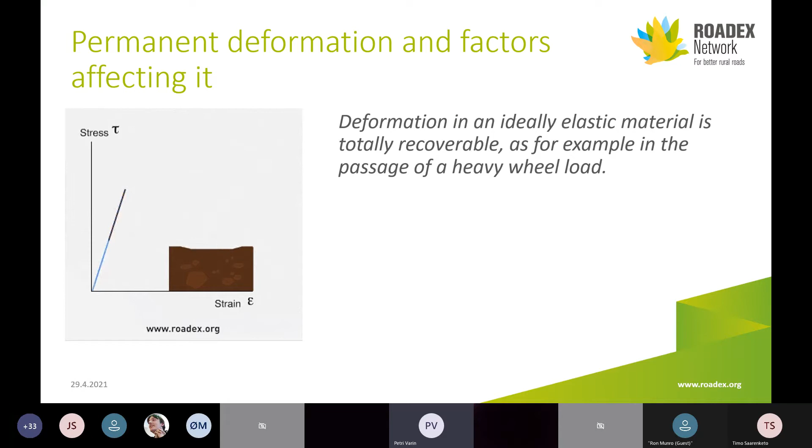Deformation in an ideally elastic material is totally recoverable, meaning that if the stress is taken out, the material returns back to its original shape. However, road construction materials are not ideally elastic, and they will accumulate some permanent deformation as a result of every load application.

Here you can see the diagram showing that the response to a heavy wheel load is always a combination of some resilient deformation and a small proportion of permanent deformation.

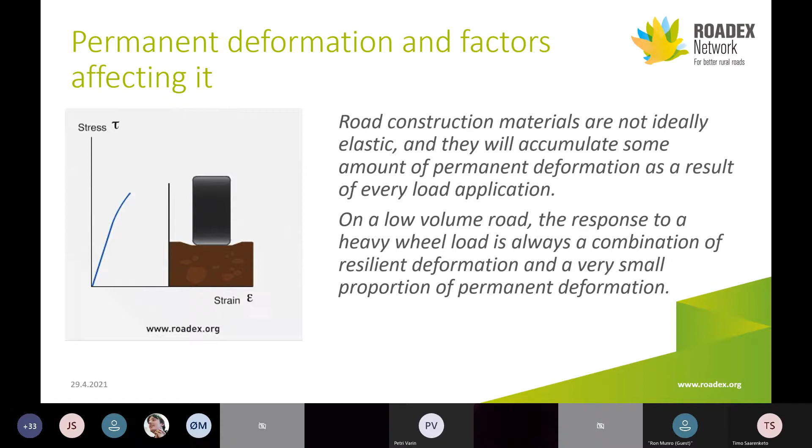When the stress is relatively low and far away from the strength and failure stress limit of the material, at the start of loading the strain increment is first high due to initial compaction of the aggregate, but then it will soon settle down and stabilize.

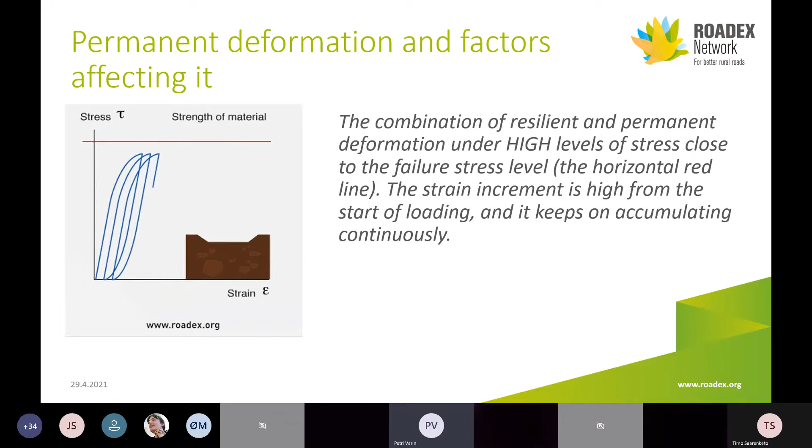To a constant level. But on the other hand, if the stress level is high and close to the strength of the material, the failure stress level, then the strain keeps accumulating continuously, it's not stabilizing anymore, and the rut increase keeps on increasing.

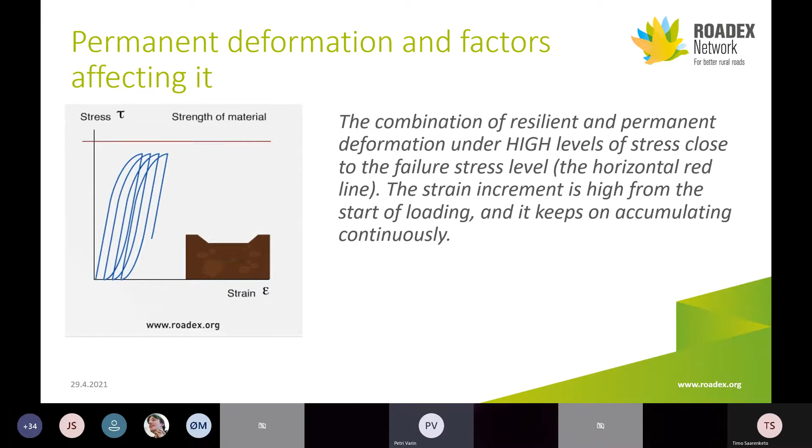So what kind of problems does permanent deformation cause? First of all, traffic safety issues.

The ruts on the roads collect water, giving a risk of aquaplaning. Different kinds of deformations, bumps and settlements on the road cause warping of trucks and unhealthy vibrations to truck drivers, and other traffic safety issues, a risk for accidents.

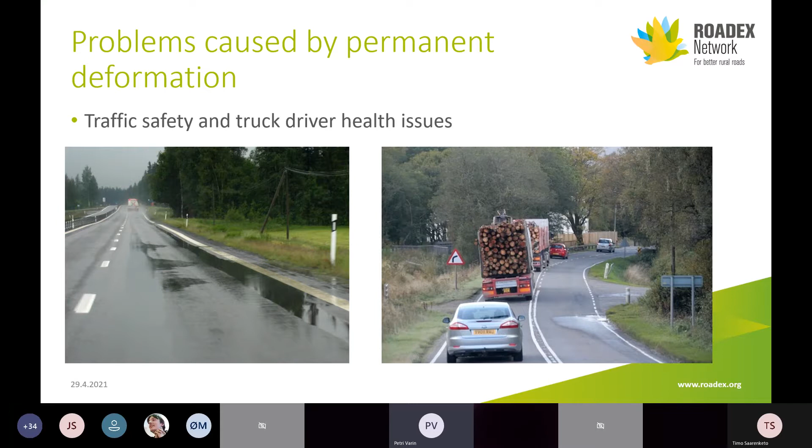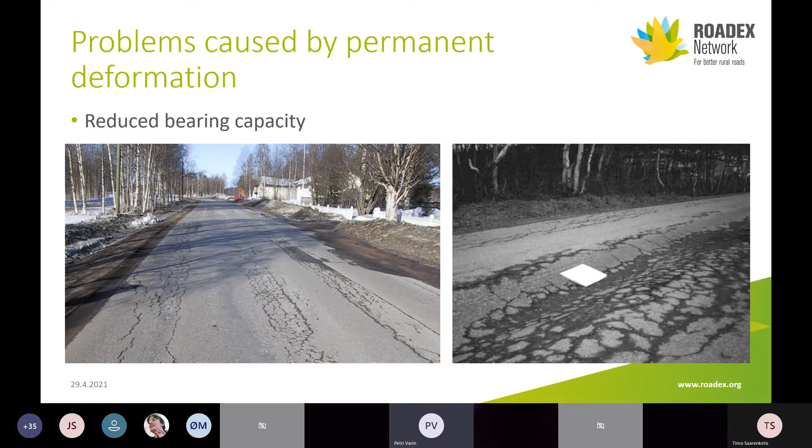Reduced bearing capacity - first of all, low bearing capacity is a reason for permanent deformation to take place, and on the other hand, when there is permanent deformation on the road with damages and ruts, it accelerates the rutting further.

Higher road user costs, for example higher tire costs and increased fuel consumption due to the uneven road and the ruts, and higher road owner costs as well, as I already mentioned and showed.

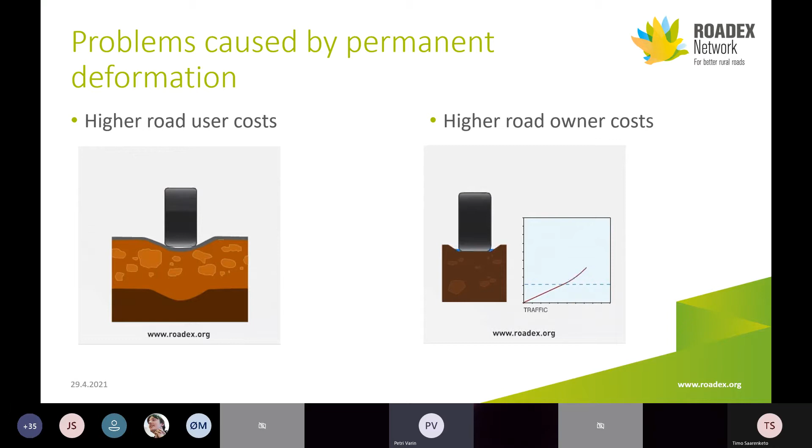The ruts in the road collect water, and that together with the traffic accelerates damage exponentially after the ruts start to collect water. Then the damages on the road also start to increase exponentially.

Lesson number 2 gives more detail and some idea of the stresses and strains in the road structure.

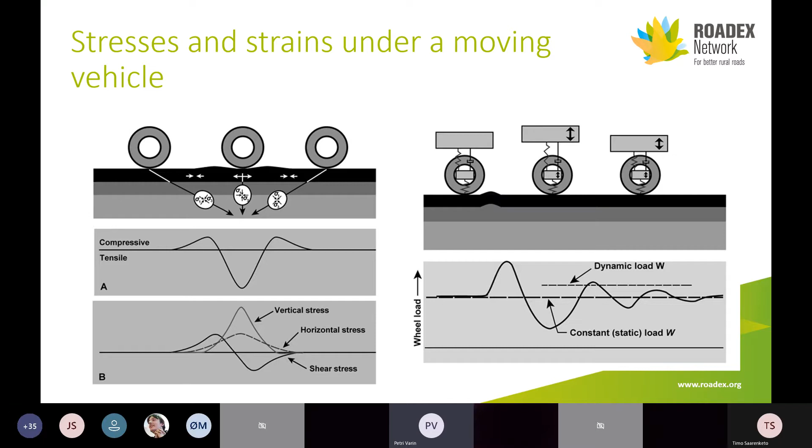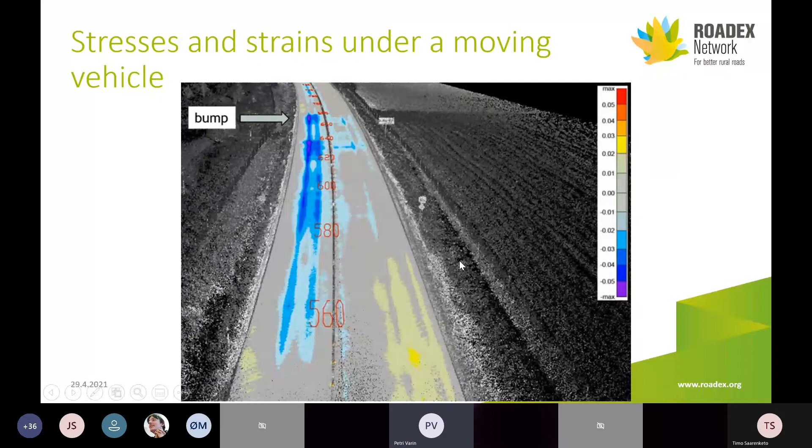With a traffic speed of 80 to 100 kilometers per hour, one bump on the road can have an effect on the pavement for almost 200 meters, and you can even see in the picture the locations where the truck's suspension hits down after the bump. So the effect of one bump can be very long on the road.

Road construction materials follow a viscoelastic behavior. They are not... they need some recovery time after they have been loaded.

In this picture you see 2 aggregate trucks and truck-and-trailer combinations passing the Koskenkylä Percostation in Rovaniemi, Finland, and their effect on the dielectric value in the poor quality subbase. The material response follows typical viscoelastic behavior.

Truck number 1 first raises the pore water pressure, then the second truck and the trailer of the first truck follow. There's a little bit of time to recover, but not enough before the second truck and trailer comes, showing the typical pumping effect. In this example, it takes 18 seconds to recover back to the original level.

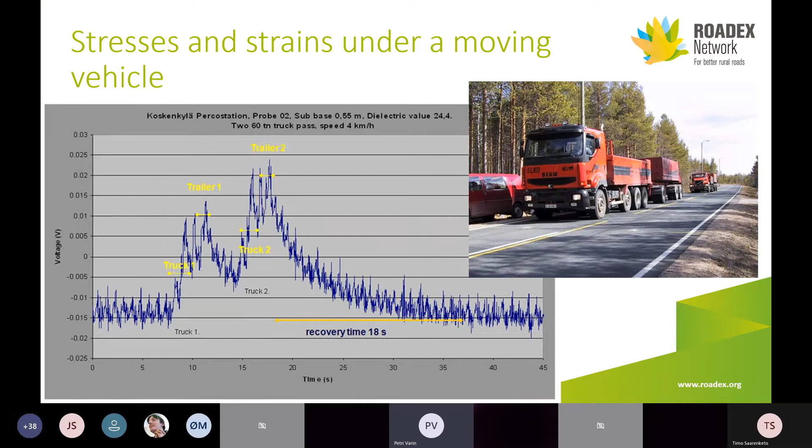A key step in improving the condition of a road suffering from permanent deformation is precise and reliable problem diagnosis. The structural quality of a road is defined by its so-called weakest link. Here on the figure on the left, the weakest spot is located at the subgrade level, and the structure has the risk for mode 2 rutting.

And on the right, the highest risk is in the unbound structural layers, and the risk is for mode 1 rutting.

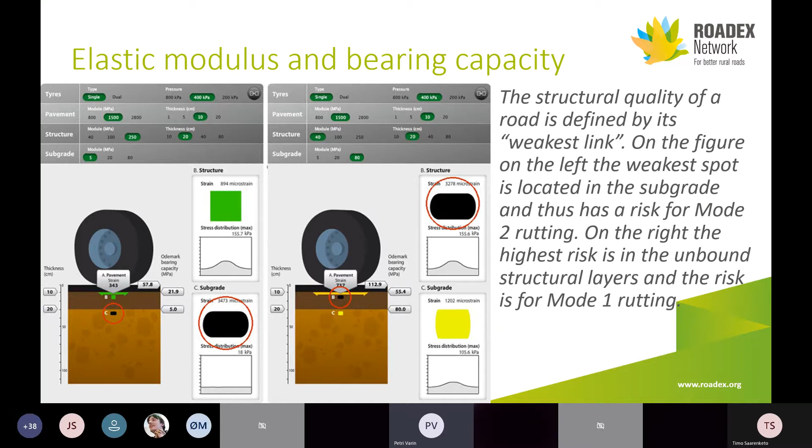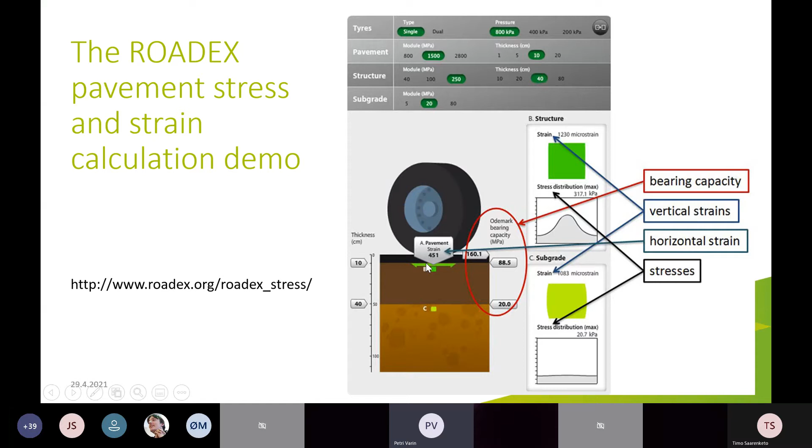Those examples in that previous slide and this one here are taken from the ROADEX pavement stress and strain calculation demo. There is a link to that demo at the end of lesson 2 of the eLearning package, and there you can change the tire type, single or dual, and the tire pressures, and the pavement structure and subgrade modulus and thickness for the pavement structure, and you can see right away the effect on the stresses and strains and the overall bearing capacity of the structure, shown with these arrows and rectangles.

Lesson number 3 presents the permanent deformation rutting classification according to the ROADEX project.

First, mode 0 rutting takes place through the compaction of the non-saturated materials in the pavement structure, and in practice some level of mode 0 compaction always takes place in the road structure after its construction. Normally the construction compaction prior to trafficking is sufficient to prevent further compaction under trafficking, and this mode of rutting is usually self-stabilizing. In other words, the compaction that happens prevents further compaction.

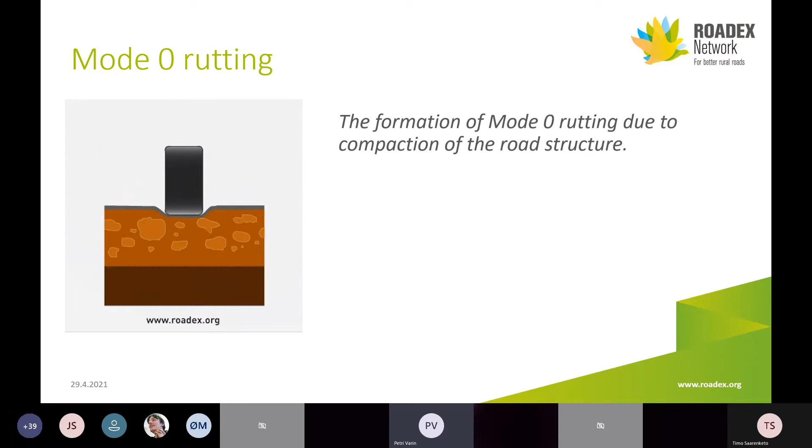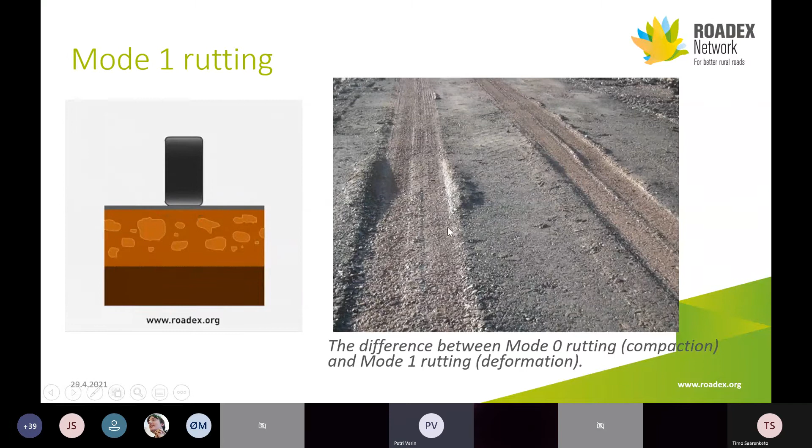It also causes the compacted material to stiffen and thereby spread the load better. Then mode 1 rutting happens in weaker granular materials where local shear stresses occur close to the wheel, so it takes place in the top part of the structure. It gives this dilative heave immediately adjacent to the wheel track where the granular material deforms. The picture on the right shows the difference between mode 0 rutting, the compaction, and mode 1 rutting, which is deformation of the granular materials.

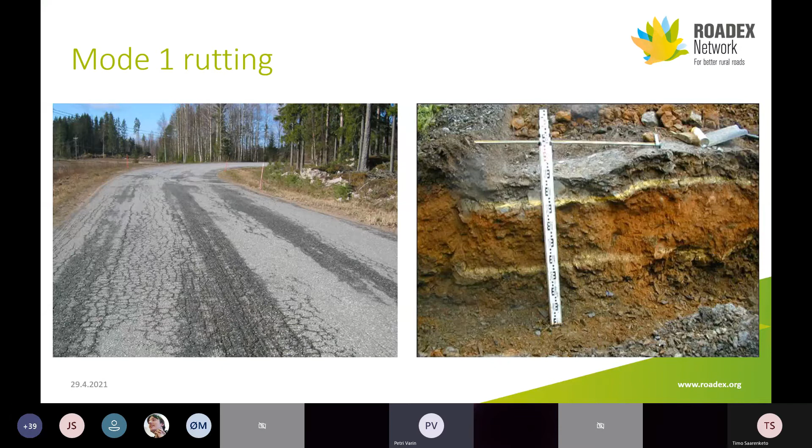Then mode 2 rutting takes place at the road structure and subgrade interface. Mode 2 rutting occurs where the aggregate quality is better, and the road structure as a whole ruts. This can be viewed in idealized fashion as the subgrade deforming, and the whole structure is like a deformed shape bending over that.

The surface deflection pattern of mode 2 rutting takes the form of a broad rut with slight heave removed from the wheel.

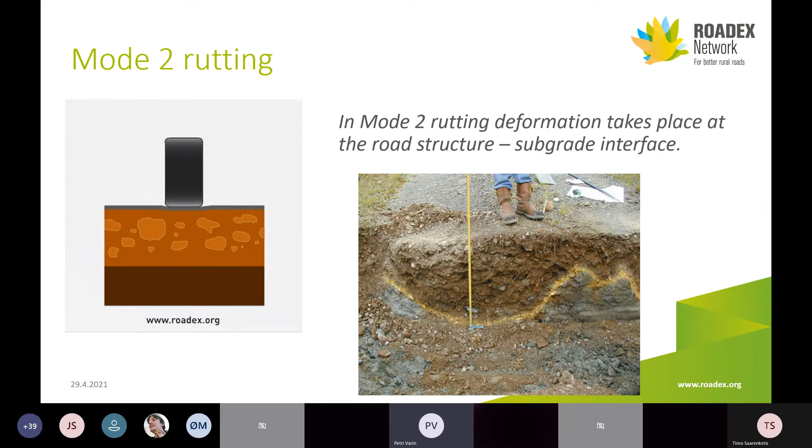On the left you can see typical mode 2 rutting on a paved road, a wide rut, and the picture on the right shows a GPR cross section from a gravel road suffering from severe mode 2 rutting problems. The structures are very thin on the shoulders and also in the middle of the road, and the wheel tracks have been rutting, with new layers filled in over and over again.

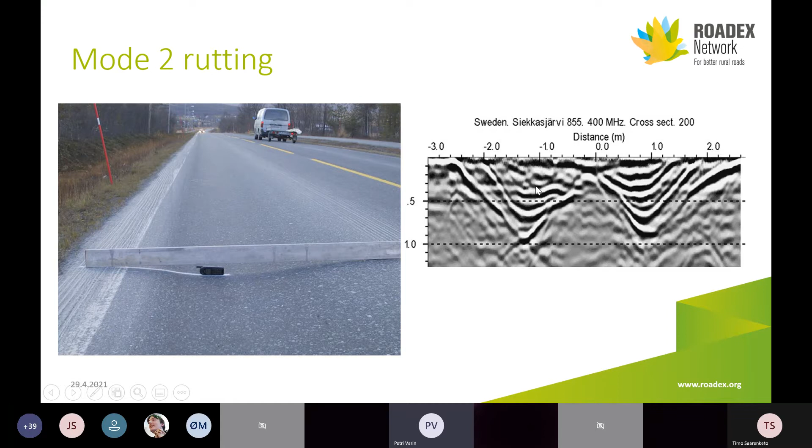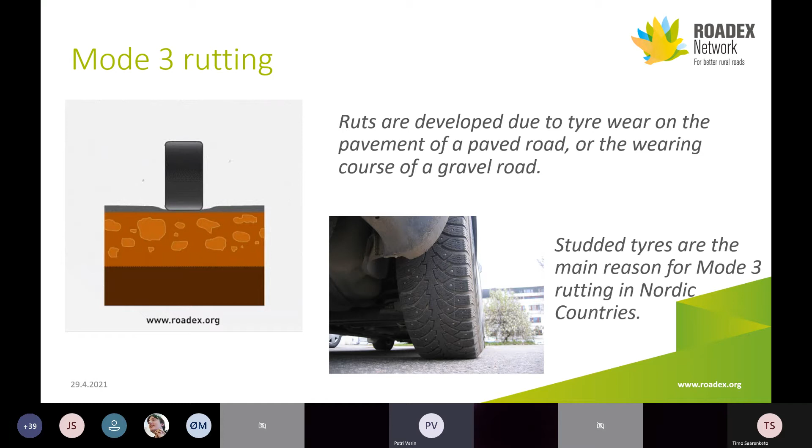Finally, mode 3 rutting is developed because of tire wear on the pavement of a paved road, or the wearing course of a gravel road. Studded tires are the main reason for mode 3 rutting in Nordic countries. Mode 3 ruts can be identified by very sharp ruts, and the distance between the rut wheel paths is normally the spacing of passenger car wheels, which is narrower than the truck axle width.

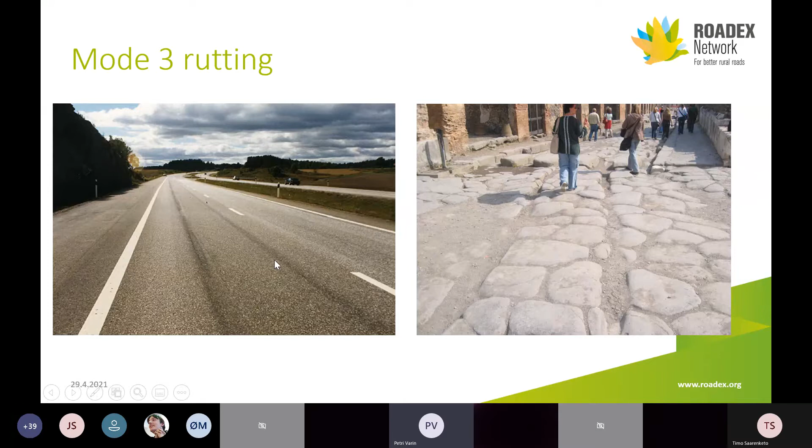Lesson number 4 presents a large number of different kinds of survey and monitoring techniques related to permanent deformation and investigation of its reasons, such as drilling, sampling, and excavations. Modern NDT techniques continue to make road diagnostic surveys faster and more reliable, but they will never eliminate the need for drilling, boring, and sampling.

Structures will still need to be verified, and the NDT surveys will need calibration data and samples taken for laboratory analysis.

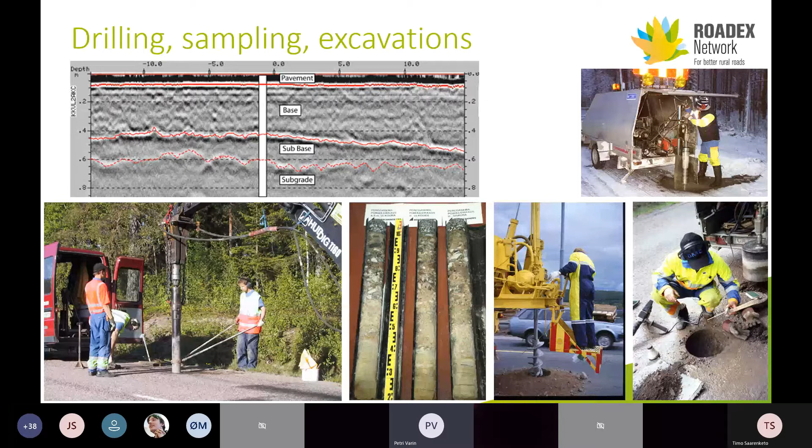Video recordings give a continuous record of the road, and from it you can detect road surface condition, pavement distress, road markings, traffic signs, etc. It can also be a very useful aid in surveying the topography of the road and its surroundings. Video recording of the road and ditches with an audio commentary is also an easy way to gather basic information for drainage analysis, for example.

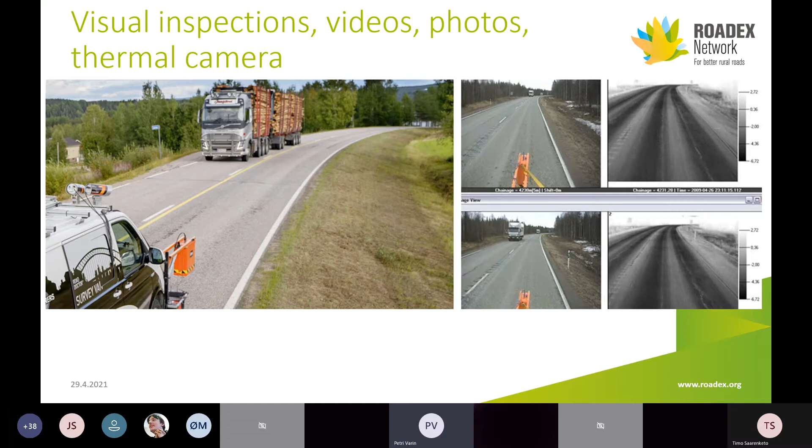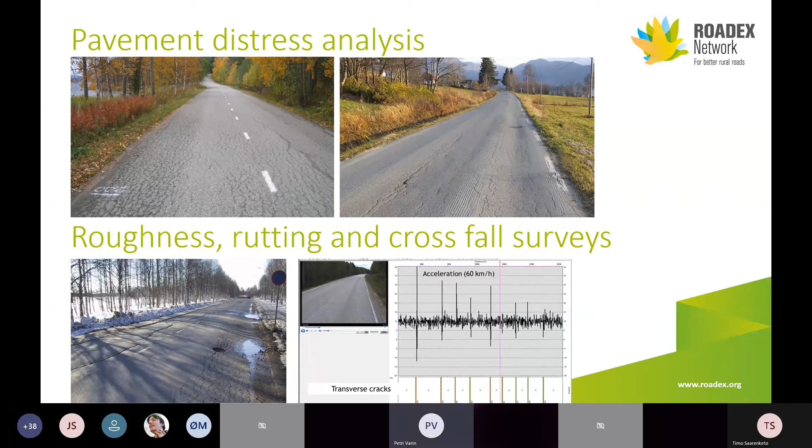Pavement distress analysis and roughness, rutting, and crossfall surveys also give valuable information about the reasons and possible remedies for permanent deformation and the different rutting modes.

As for laser scanners, in recent years the greatest development in NDT techniques for road surveys has been with laser scanners, and these systems have become a standard tool for various tasks in the road condition management process, such as measuring rut depths, ditch depths, ditch slope steepness, crossfall of the road, and so on.

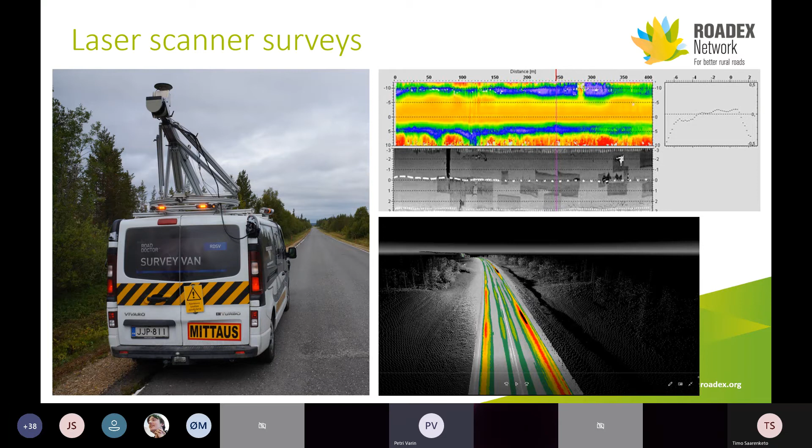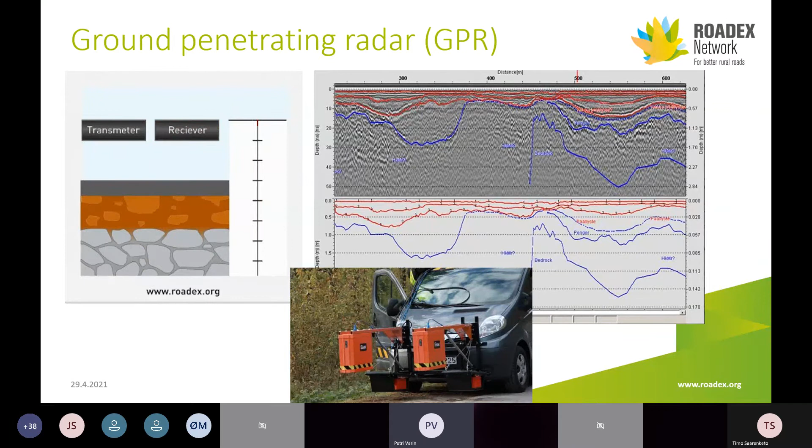Then GPR, ground penetrating radar. It's a non-destructive ground survey method, and its main advantage is the continuous profile it provides over the road structures and subgrade soils. As a consequence, the technique has become an important survey tool, especially for structural evaluation of low volume roads. And further, the important advantage is that it's not intrusive to other traffic. It can be performed at normal traffic speed.

Then different kinds of deflection measurements: falling weight deflectometer, lightweight deflectometer, traffic speed deflectometer. They provide information on the bearing capacity of the structure and stiffness, and directly from the measured data, many bearing capacity indexes such as SCI and BCI can be calculated, which provide information on the location of the weakest link in the structure. Also, when the deflection measurements are combined with GPR thickness interpretation, the modulus of different layers in the structure can be back calculated, and further the bearing capacity of the whole structure.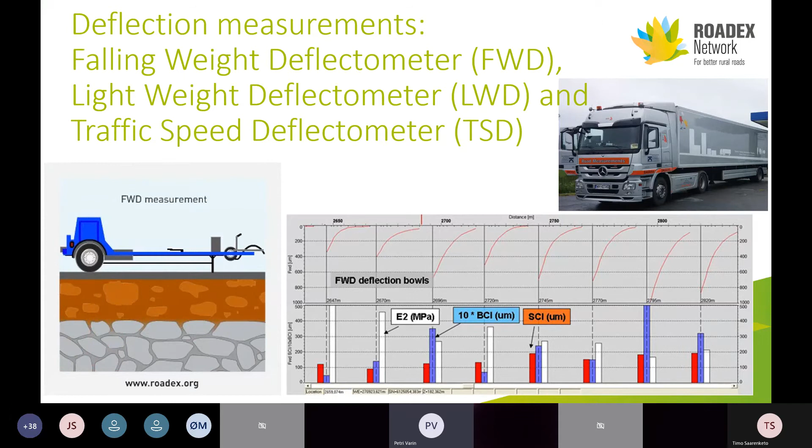And a large scale of different kinds of laboratory tests can be performed on samples taken from the road, starting from basic grain size distribution and water content and so on. Then water suction properties of the structure, frost heaves and chlorides and so on, up to full scale, large scale triaxial tests to give lots of information.

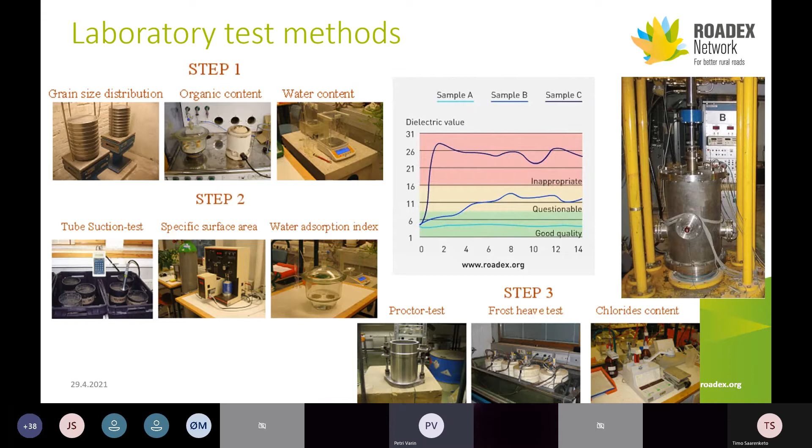Then lesson number 5 in the e-learning package presents different kinds of classifications, analysis, and diagnostics, especially classification of subgrade soils and topography. Information on the subgrade soil type and the surrounding topography is needed initially to allow the designer to select the most suitable drainage solutions and also the most appropriate rehabilitation structures.

The lesson presents different topography and subgrade soil types and special things to take into account with those. And of course, drainage is one important thing to classify also, but that was already covered in a whole separate webinar last week.

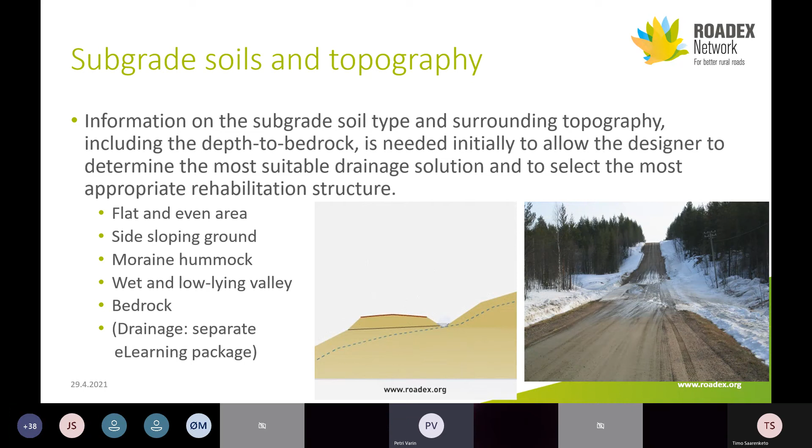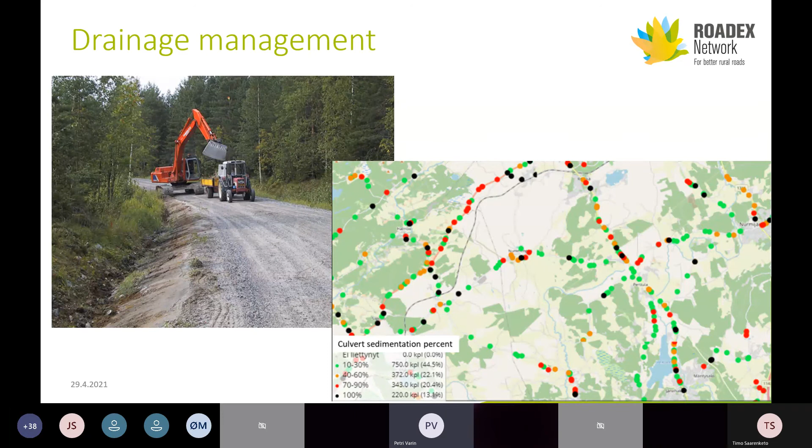Then lesson number 6 is about managing permanent deformation. Drainage is always important. Then managing loading and seasonal changes. The trucks are getting heavier and heavier all the time, and you will hear later a little bit more about that also. Managing the loading can be done also by setting load restrictions during the springtime, for example.

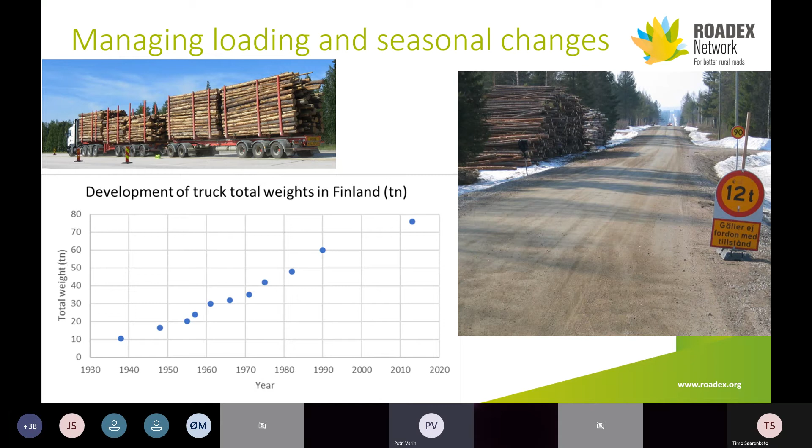And then CTI: an alternative way of reducing stress on the road is to amend the contact pressure of vehicles' tires on the road by reducing the pressure in the tires and enlarging the contact area. Central tire inflation, CTI, is the generally accepted terminology for the onboard automated system of tire pressure control that permits the driver of a vehicle to adjust the pressure of tires while in motion.

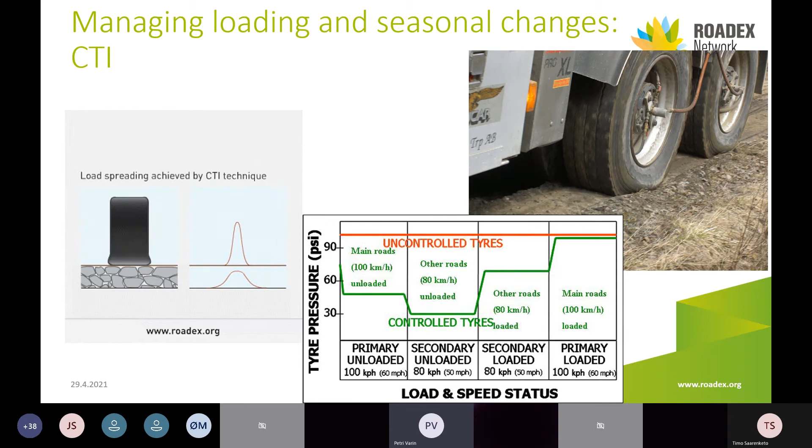Mode 1 rutting problems on forest roads can be managed or reduced by using vehicles with special axle configurations, or by driving in varying lateral position on the road cross section. An example of the first option can be seen in this picture from Scotland, where the tires of a truck have been specially constructed to be out of line longitudinally, and they act as a roller compactor, preventing the formation of ruts.

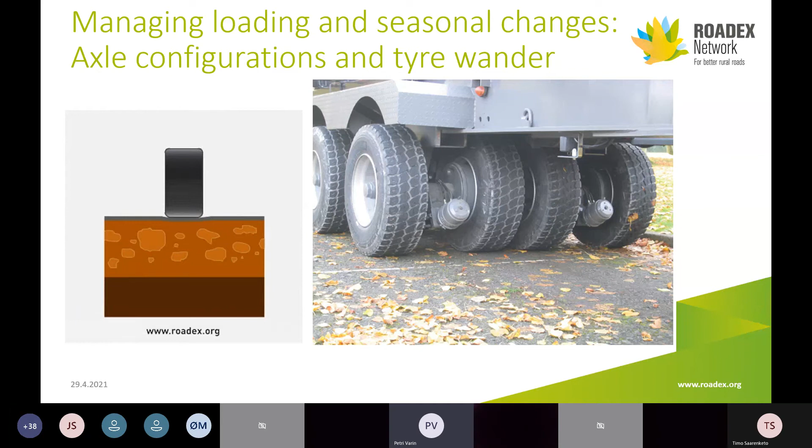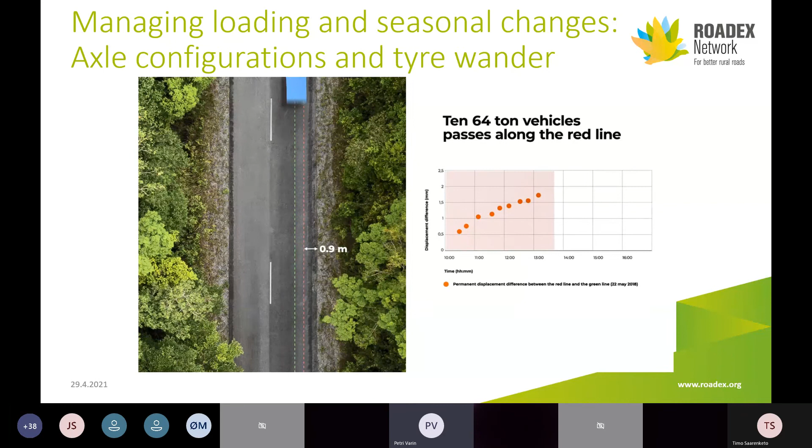Another option to manage permanent deformation is so-called artificial tire wander, which means that loaded trucks are driving in different parts of the cross section, which causes a specific rebound effect for the permanent deformation and reduces rutting. This phenomenon has been found in Finland when testing high-capacity transport trucks with increasing numbers of axles driving exactly the same path, and you will hear about this also more later.

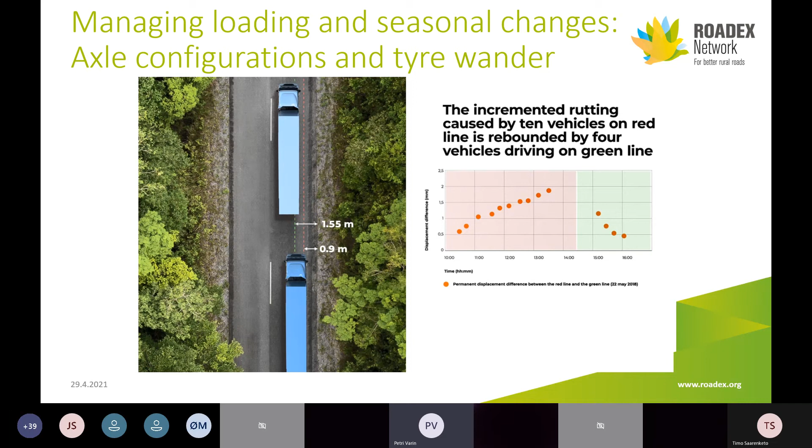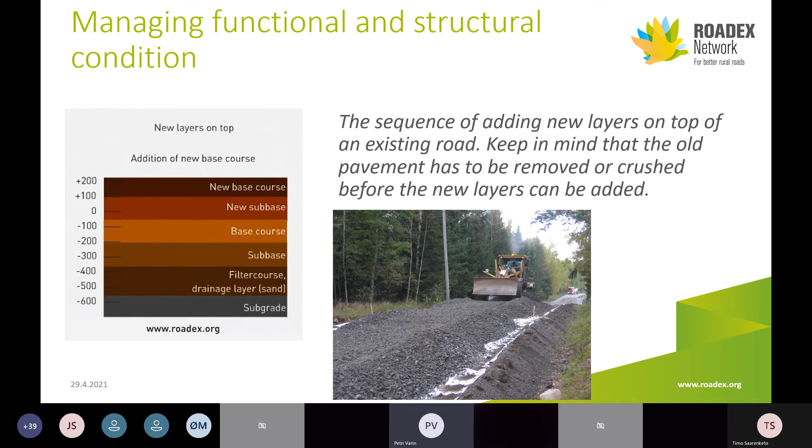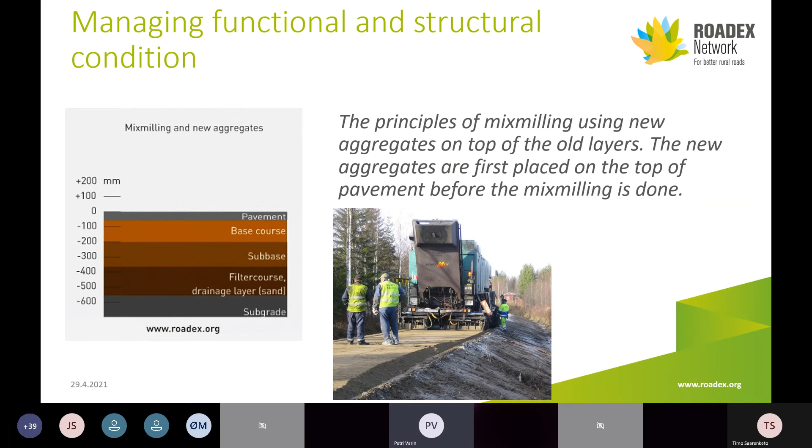Lesson 6 also presents a large number of different structural options for different kinds of problems and for the problems caused by different rutting modes. There is a large number of example structures, such as adding new layers on top, as you can see here, mix milling, using adding with new aggregates on top, and then mix milling, or also other options. The eLearning package contains others as well.

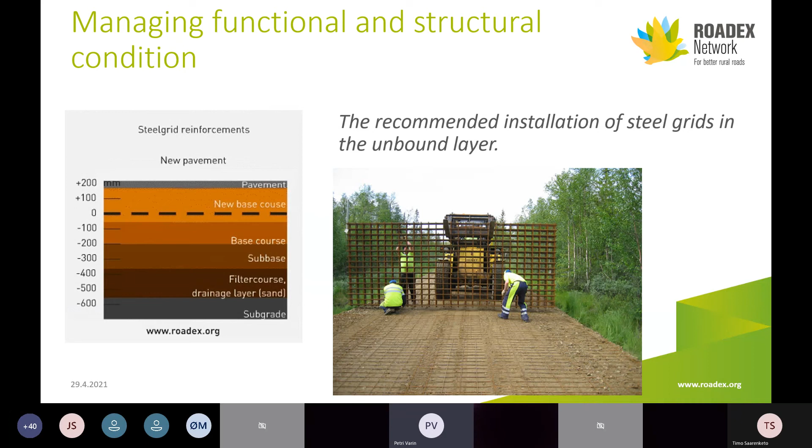Then steel grid reinforcements installed in the unbound granular base course, that's the recommended installation location inside the unbound base course. Sometimes the reasons for the damages can be such that the only correct remedy for the problems is soil replacement, digging out the whole road structure and building new layers for the whole structure.

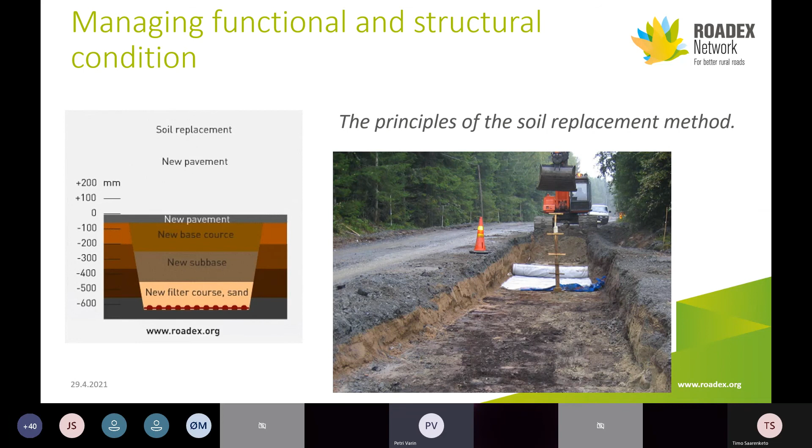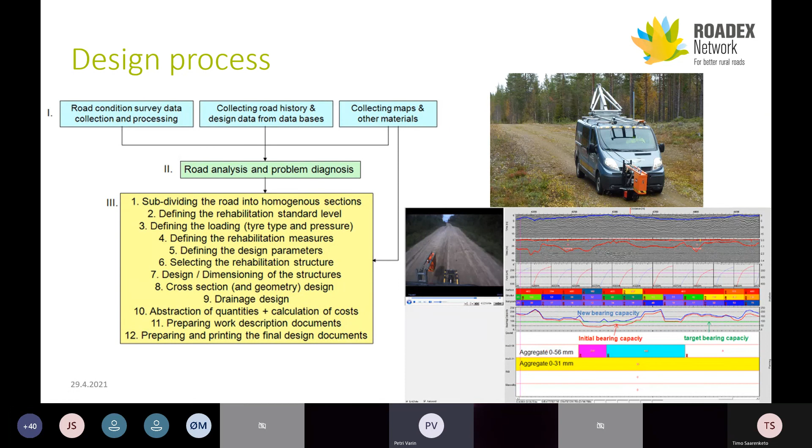And finally, the 7th lesson in the eLearning package presents the design process against permanent deformation. There is a detailed description of the design process, starting from surveys and collecting and processing data, collecting road history and other earlier data from databases and maps and so on. Then doing the analysis and diagnosis for the problems' reasons, and then the design process itself is described. There are many phases in that, and it's described in detail.

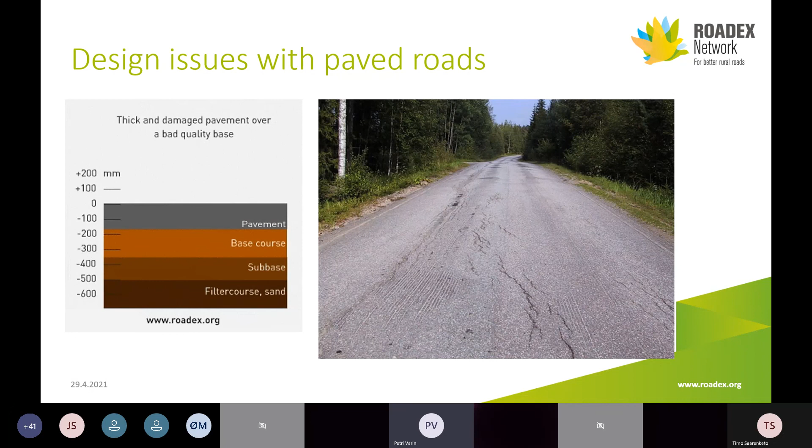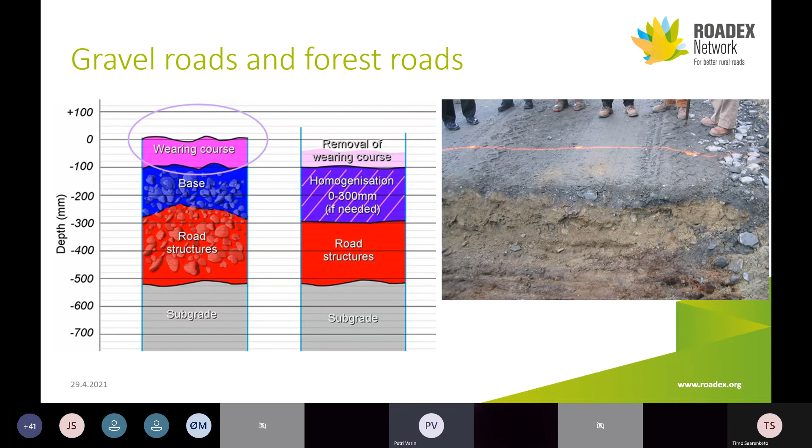The lesson also gives some special design issues with paved roads, what should be done with some special problems, and also special design issues with gravel roads and forest roads, such as that the wearing course of a gravel road should always be removed before adding new layers on top, and things like that.

That lesson also presents again material treatment techniques against permanent deformation, such as different kinds of stabilizations, and also the use of so-called non-conventional treatment agents that can improve the material quality.